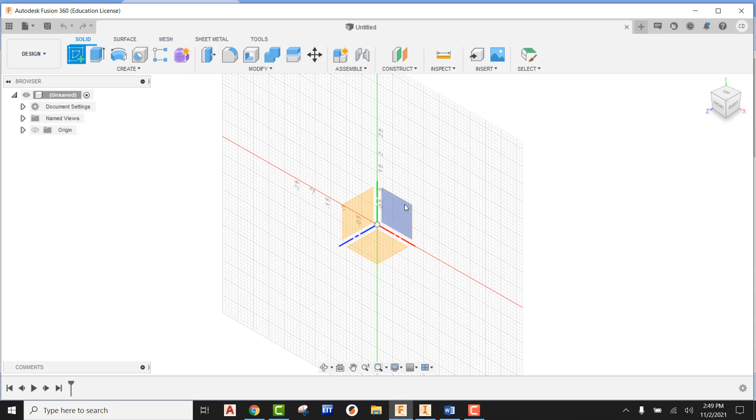So I'm going to be starting these right here on this work plane, and I'm going to be creating my profile that I'm going to use in order to create the candy.

Going up here to create, I'm going to be finding ellipse. I'm going to start my ellipse right here at the origin. I'm going to pull this over to my right and then pull up on it. I don't care about dimensions at this point. That is the shape I'm going to be looking for in order to create the profile.

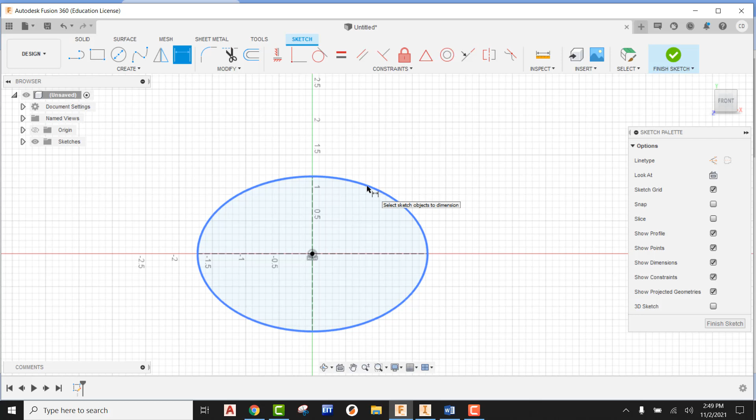Now we can go ahead and begin adding some dimensions to this. Using my dimension feature, I'm going to come here to the top right-hand side of my ellipse. I'm going to pull up on this, and we can see that this is going to be asking us for half of our major axis. We found out in class that half of this dimension would be 0.265.

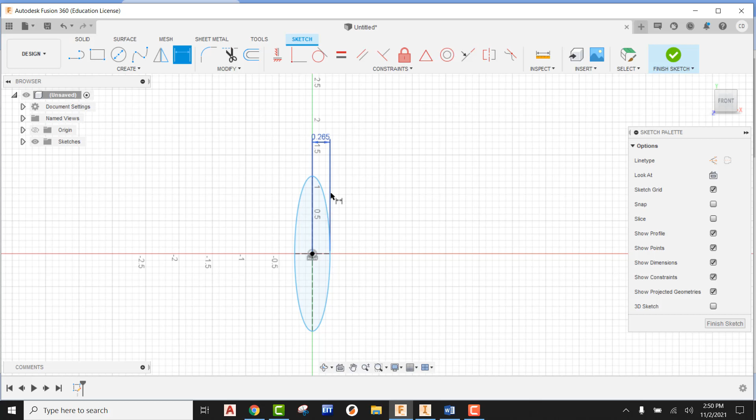Now, if it gets all wonky on us, don't freak out because we still need to add one more dimension. I'm going to be picking the top right-hand corner of that ellipse, pulling this over, and now it's going to be asking for half of our minor axis. We found out in class that was 0.135 using our dial calipers. There we go, we have that ellipse. Our linear dimension this direction is 0.265, and our height is 0.135.

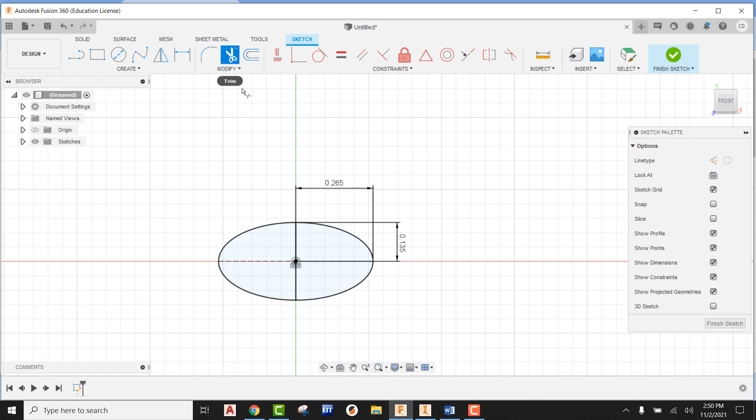Since we're wanting to revolve this, what we first have to do is come up and draw a line at the top of our ellipse, taking it down to the bottom of our ellipse. When we go to revolve, it's going to want half of the profile, so I'm going to use trim. The left-hand side of our profile, I'm going to pick it to remove it, and now that leaves us with half of our ellipse.

I'm going to go ahead and finish the sketch on this, look at this in a home view, and now I'm going to use Revolve. Revolve, if it has just one profile available, is pretty smart. It's going to detect where that closed loop is. We can see it's detected that because it's this dark blue.

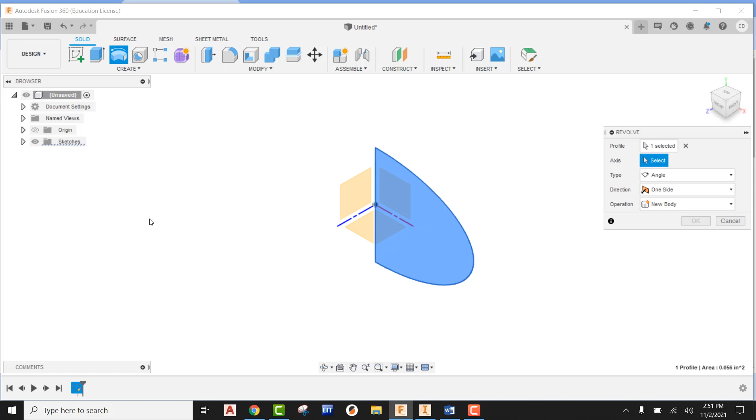Right below that, it's now asking for us to select our axis. Our axis in this case is going to be this vertical line. We send that around the full 360 and we say okay. And there we go, that's the first part of our M&M.

I'm going to go ahead and do a save right now, and I'm going to call this my M&M candy shell. That's going to be my first part. Now, the problem is, if you're looking at this, you're realizing that this is solid. This is not going to be solid, it's actually just going to be the outer shell.

In class we opened up an M&M and used dial calipers to measure the shell thickness. We found that it was 0.02 inches.

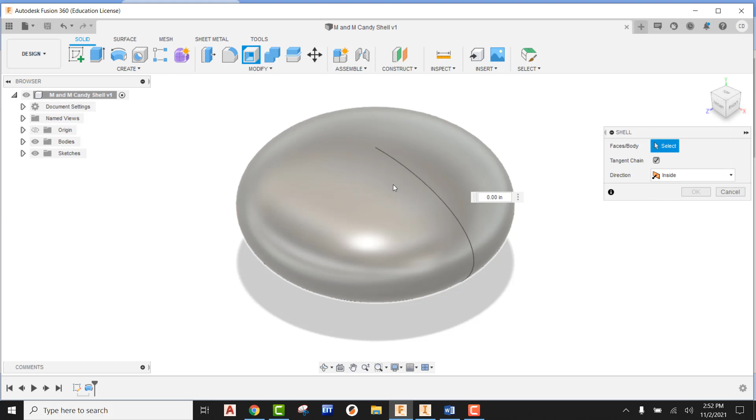So what you're going to have to do is come up here and use Shell. It's going to ask you to select the faces or the body, so we pick it. Now it's asking for the thickness of that wall, so we type in 0.02 and say okay.

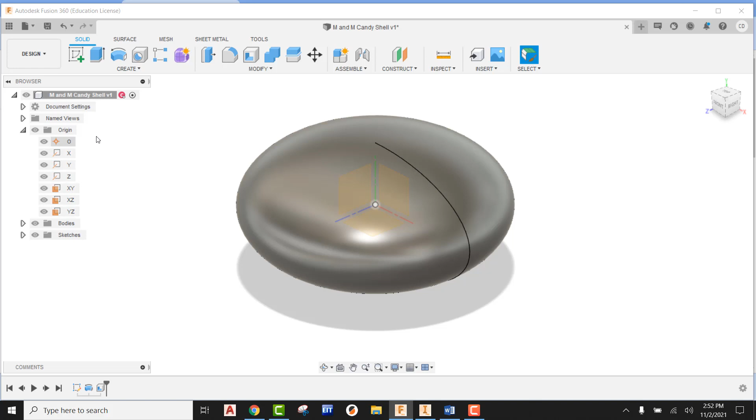It is now shelled out, but the problem is this is completely enclosed, so we can't see if that actually did the job. So I'm going to turn on my origin folder, which will show all three axes, all three planes, and the origin. Up here under Inspect, you can see something called Section Analysis.

If we pick on section analysis, we can go to a plane and pick on it. The good candidates in this case would be this one or this one - this is going to be the long way, so either one will work. I'm going to pick on that.

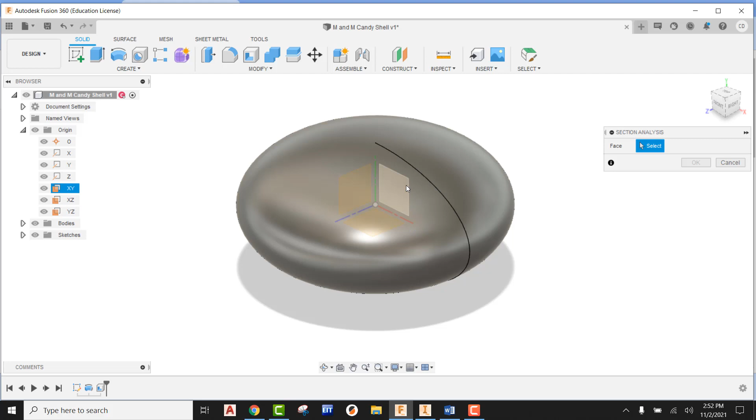Now I can see how it has sliced it down the middle, and I can see the inside of it. We can see that material has been shelled out or scooped out, and now we're left with that wall of our M&M. What's kind of cool is we can grab the arrow and see how this develops over the course of that M&M.

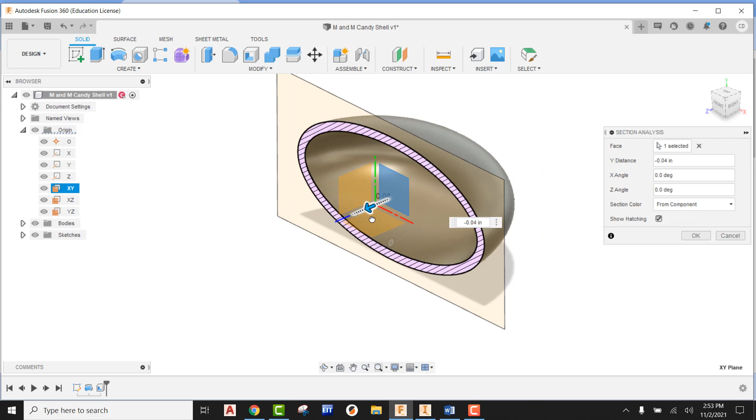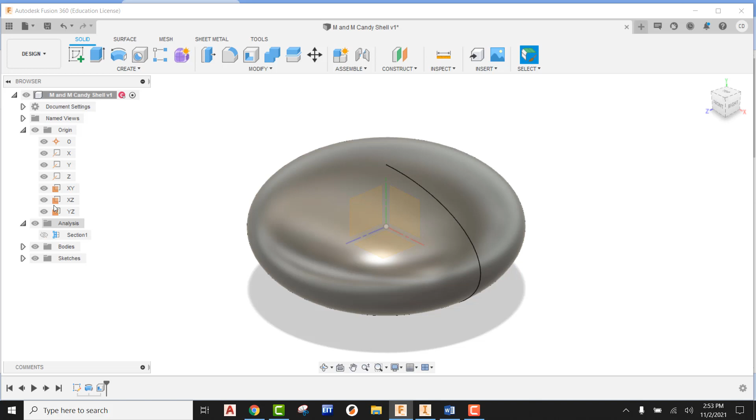I'm going to keep this exactly where it was, which was 0, right on that work plane, and say OK. If you ever want this to go away, come to your analysis and turn the eyeball off next to section - it's no longer going to show it. Also, we can turn off the origin since we no longer need that. Now we can go ahead and do a save.

Right now our M&M candy shell is made of steel. If we want to apply a material to it, we're not going to find candy coating as an option.

What we could also do, if we had the time, is flick and pick the shell off of an M&M and take that over and put it on the scale. That's going to be able to give us a weight.

In order to find out what the density of a material is, we would have to know its mass, in our case weight, and we could divide that by the volume, which we could get from Fusion. The problem is it's really hard to pick off that shell and put it on the scale and actually get a weight. The other thing is my scale in my classroom wouldn't even be able to register that actual weight since there's not enough material.

So what we can do instead is go out and find what the density of the candy coating is. Believe it or not, if we just typed in 'candy coating density,' a company has released what that candy coating shell's density is. If we look, we're going to see ounces per cubic inch - candy coating is 0.59 ounces per cubic inch.

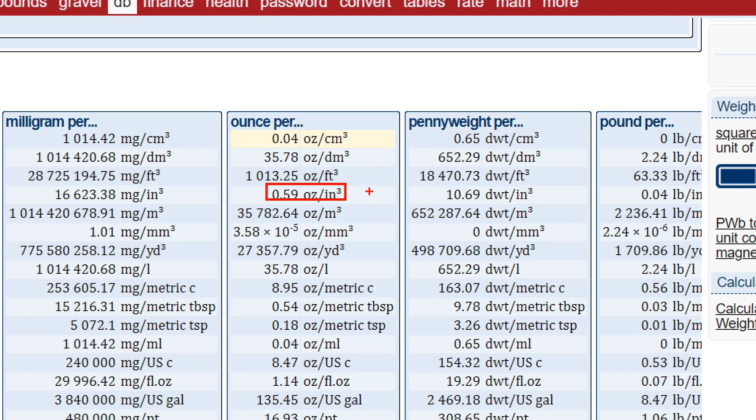Why do we want this particular unit? Well, let's take a look at Fusion. If we jump into Fusion and come up to our candy shell at the top of our browser, right click and say we want to add a physical material, we're going to see all sorts of different materials we can add to this.

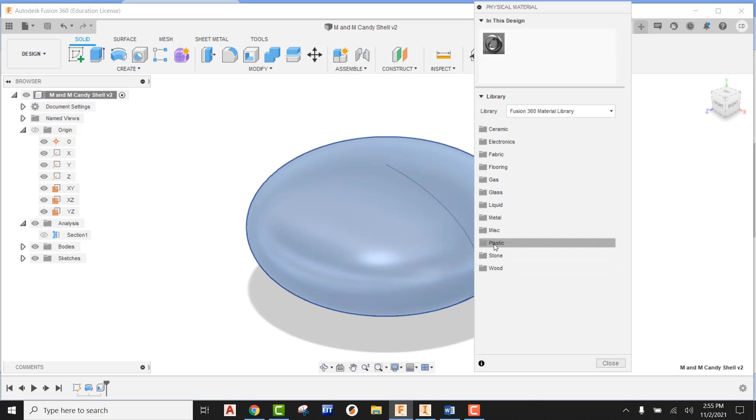In my case, I'm going to go to plastic and drag ABS plastic onto it. We can see it changes, and up here where it says 'in this design,' we can see ABS plastic. If we right click on ABS plastic and say we want to edit it, it shows us that ABS plastic in the material library within Fusion 360 is 0.613 ounces per cubic inch.

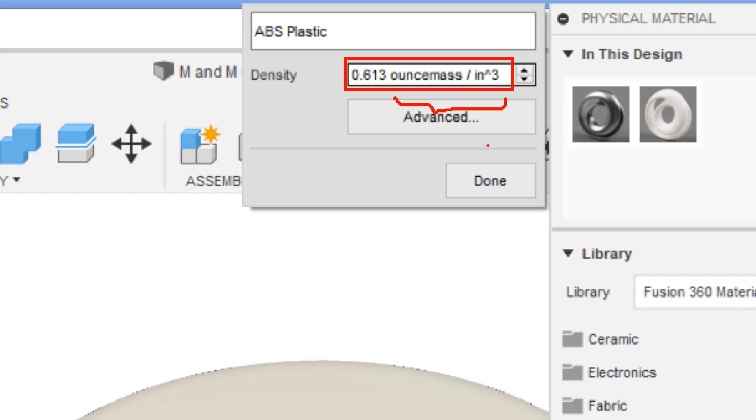That unit should look very familiar - that's what I found online. So now what I'm going to do is just close out of this.

I'm going to come into physical material. If you're just starting this, you need to come down to the plastic folder. We're going to grab ABS plastic and apply it to our part.

We're going to use this as a surrogate. It's not going to be perfect. There's a lot of other properties we'd have to enter, but right now all we really care about is making sure we have the right density so its weight shows up correctly.

So what I'm going to do is come to my ABS plastic after I've applied it, right click on it, and pick edit. Up here at the top, I'm now going to give this a name. In my case, I'm going to say my M&M is going to be red, and I'm also going to say candy coating for my description.

Now my density is coming in. It's asking me, do you want to keep this at 0.613, which would be the one for ABS? I'm going to say no, I want to apply that number I just found online, which was 0.59. So I'm going to change this to 0.59 ounces per cubic inch.

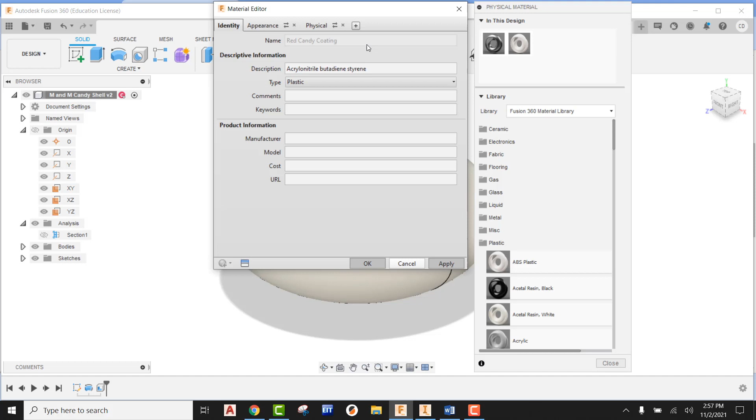I'm not done yet because I want to make it look like the candy shell color. So I'm going to go to Advanced, into the Appearance, come down, pick on the color box, and pick a red color. If this is too bright, you can always darken it up using this slider, but I like how that looks on top. So I'm going to say OK, hit apply, and then cancel out.

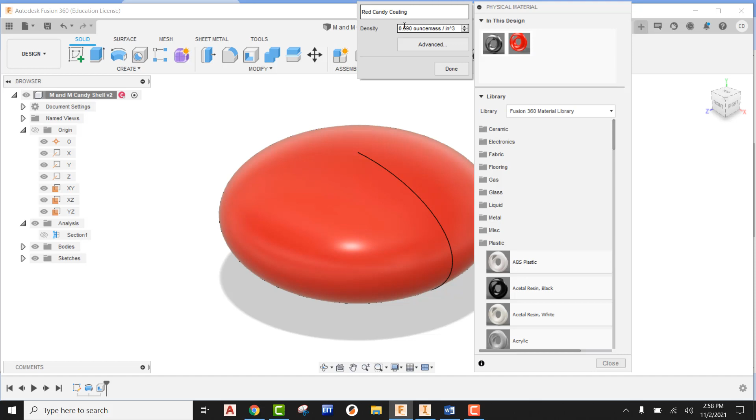Just to make sure we've done this right, I'm going to right click on this again, pick edit. I can see it's red candy coating, it's 0.59, and obviously my color is red. So I'm going to hit done and then close out.

At this point, now we're going to go ahead and do a save. My M&M candy shell is done. So now I'm going to create a new design.

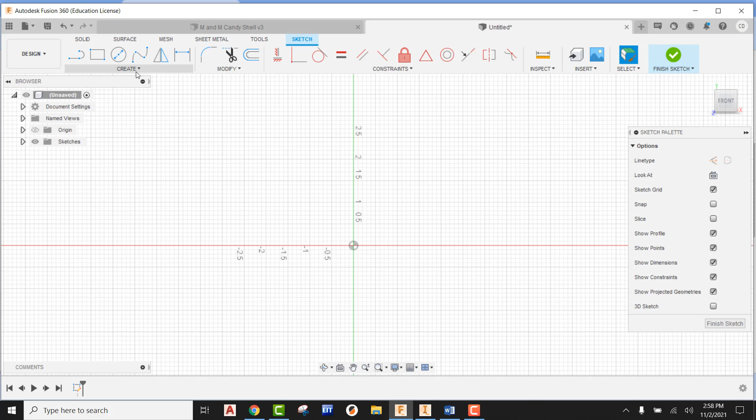I'm going to start it out the same exact way as my last one. We're going to be creating that chocolate center that's in the center of an M&M. So I'm going to create a sketch, go to my same work plane, and go ahead and draw the same ellipse that I did last time.

I'm going to go ahead and create this just like so. I'm going to use my dimension, pull this up. As we said last time, this width was going to be 0.265 — remember, this is my half dimension. I'm now going to apply this dimension for its height, which is 0.135.

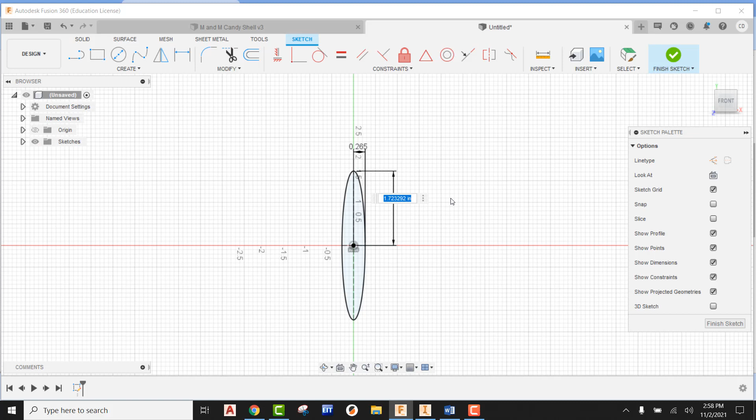Now what I'm going to do when I come in here is I need to create the shell, because right now this profile is going to be the same exact size as our shell. So I'm going to be using offset.

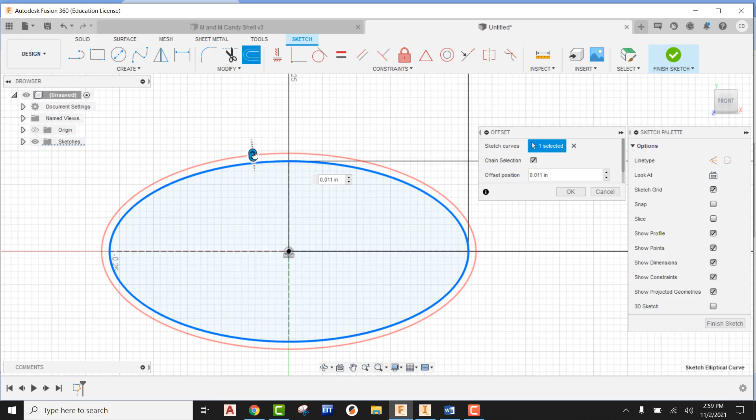I'm going to pick on the ellipse, use the scroll bar, bring it down towards the center, and now it's asking me how far I want to bring that in. So this is just your wall thickness. Since this is indicating negative, I need to put in a negative, and I'm going to type in negative 0.02. And now I'm going to say OK.

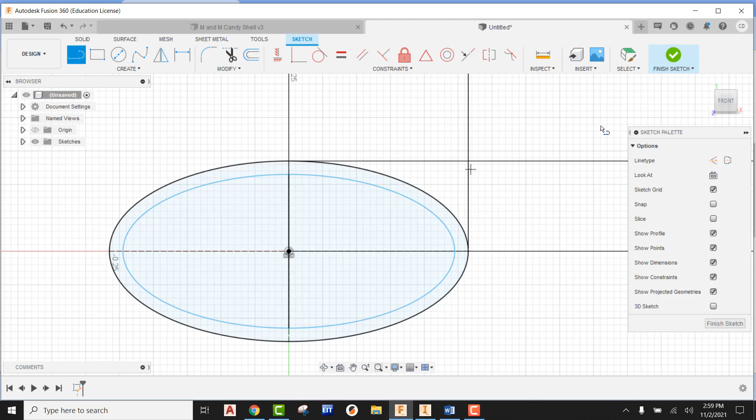So that's the actual thickness of our candy shell. What I'm now going to do is create the profile I'm going to use to create that chocolate center. So I'm going to draw a line starting from the top of this inner ellipse, take it down to the bottom. That's there for me to use. So I'm going to finish up the sketch and look at this in a home view.

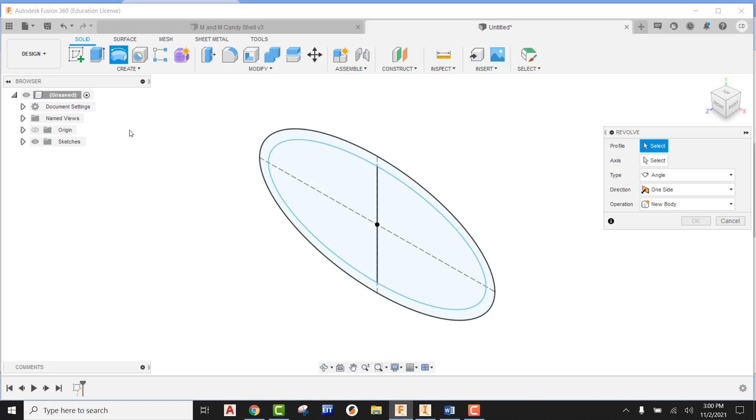Now we can use revolve. Revolve this time is not going to be as smart because there are too many profiles out there. If I were smart, I would have gone out there and trimmed this up and done whatever, but in this case I'm just going to leave this as it is so it shows where that candy shell is. Since it's not smart enough to detect that, we have to come in and pick on the inside of the profile that we want this to revolve.

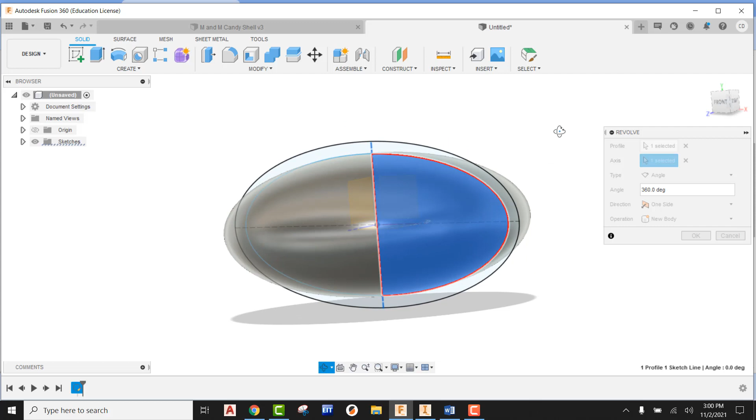Now it's asking us right below, there's a little selection box, we have to pick it. We're going to be picking on that vertical line, and it's going to be sending it around. If I orbit this over, you can see how that chocolate center is right in the middle of where that candy shell would be, and I'm going to say OK. All right, so there is our chocolate center.

At this point in time, I'm going to do a save. I'm going to call this my M&M Candy Chocolate Center, and I'm going to do a save.

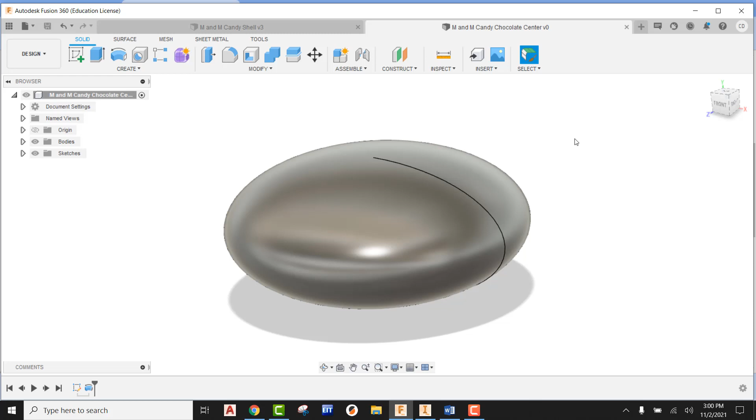So the same issue we ran into last time, right now this is going to be steel, and that's not going to work for us. So just like last time, we're going to go out and find what the density of the milk chocolate is for Mars candy, for M&Ms. We're just going to Google this up, milk chocolate density for Mars, and I can see Mars snack food, this is for M&M's milk chocolate candy. If I come down, I'm going to see that my ounce per cubic inch is going to be 0.51. So we can use that in Fusion.

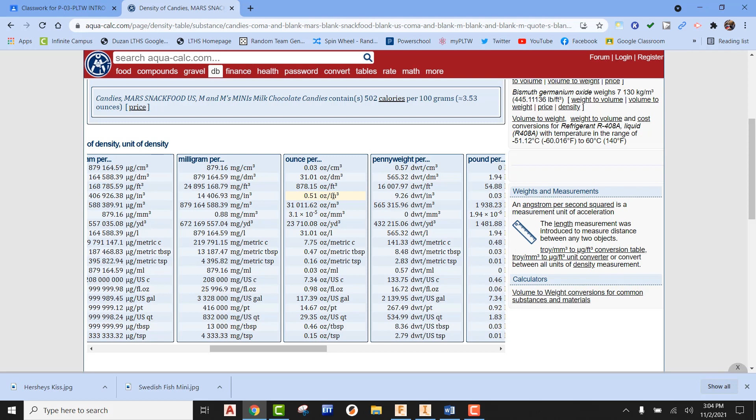So here we go. If we right click up here at M&M Candy Chocolate, what we're going to do now is right click on this and pick on physical material. Once again we're going to be using ABS, and our plastic folder is our surrogate, we're going to apply it to it. Now we're going to come up here to ABS plastic, right click and say edit, and we're just going to call this milk chocolate.

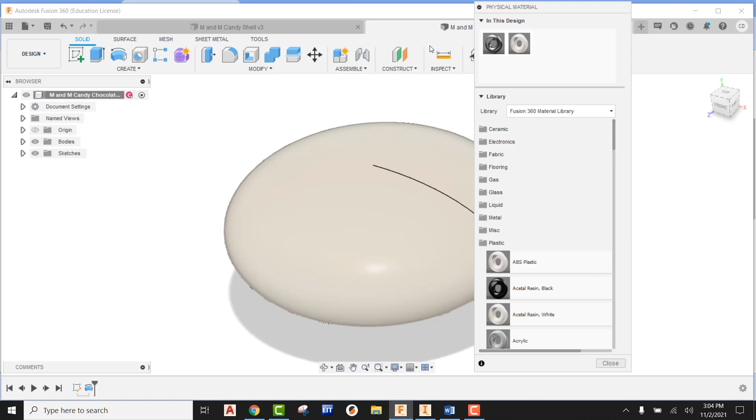Our density is obviously not correct, this should be 0.51. Now we can come in and go to advanced, go to appearance, go to our color. We can select the brown color, darken this up to make it look more like chocolate, say OK, apply it, and cancel out.

Just to make sure that this is right, we're going to right click here and say edit. It's 0.51, it's milk chocolate, it's the color, so we're done. We're done with this, so now we can go ahead and close out and do a save.

The only issue we're going to run into is when we go to create our assembly, there's not going to be a joint origin here. The reason is that even though we've offset the existing ellipse, it's not going to detect that as a point to put a joint origin, so we have to manually put one in.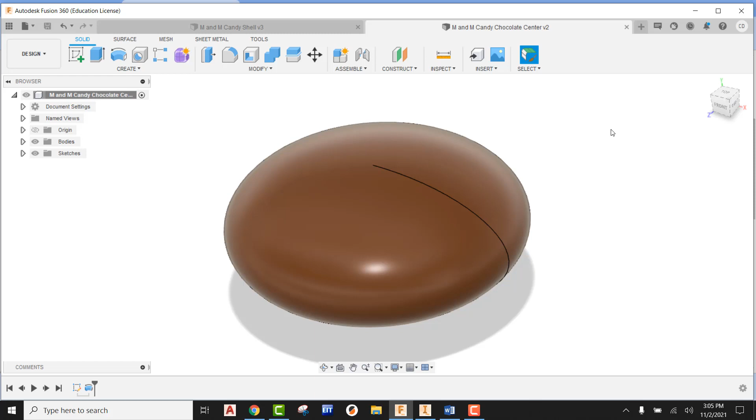In order to do this, we're going to come up here to the origin folder and turn on the eyeball. Now we can see our planes, our axes, and an origin. But since we want to create a joint origin, we're going to come underneath Assemble and pick on Joint Origin. It's now asking us where we want to put our joint origin. We can place that right here at the origin itself and say OK. So now we can go ahead and save that up.

So now we have our chocolate center to use for our M&M. We have the candy shell, we got the chocolate center. Now we're ready for the assembly.

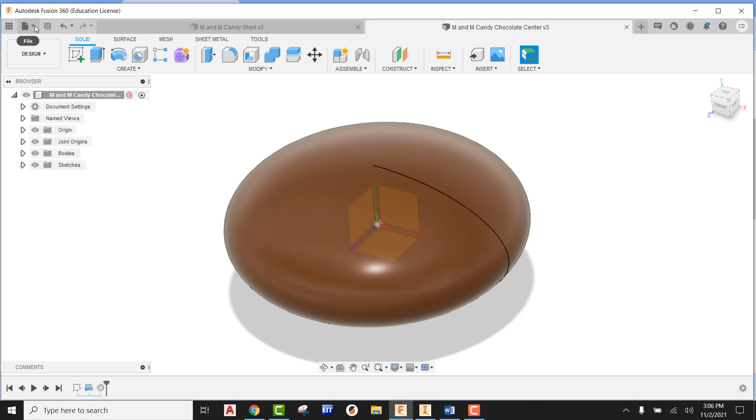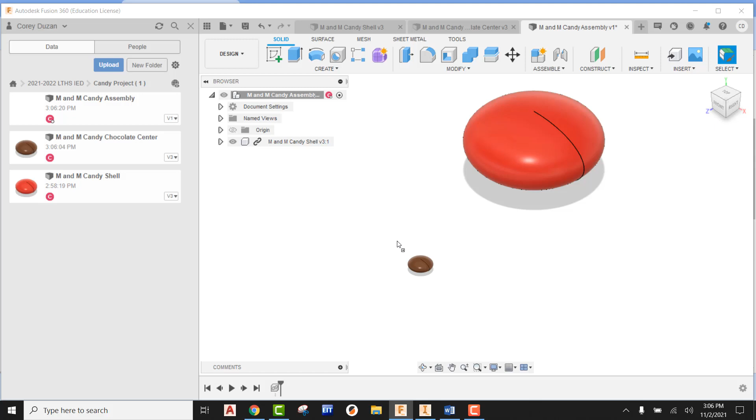I'm going to come up here, start a new design. I'm going to save this as M&M Candy Assembly. Using my data panel, I can go ahead and bring in my shell, drag this off the origin, say OK, and then I'm going to bring in my chocolate center, drag this off the origin and say OK.

The first thing we must do with every assembly is come out here and make sure that one of these parts is going to be grounded. So I'm going to go to my shell, right click on it, and come up here and pick on grounded. So the shell is not able to move, but my chocolate center is.

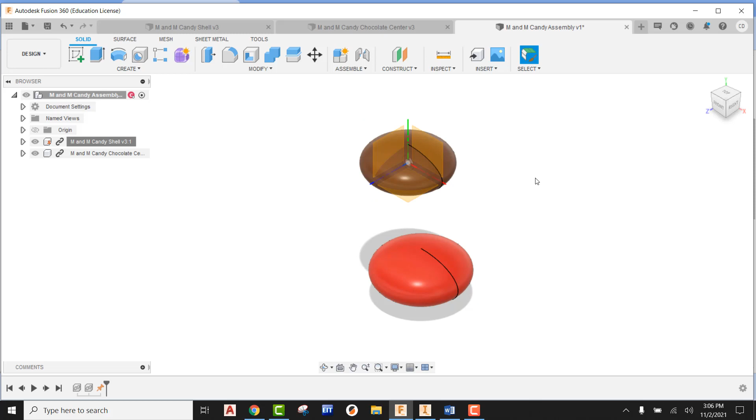All right, so all we have to do now is just assemble this. If we come up here to joint, we can come in here close, we can find that joint origin, we can pick it, and now we can take that over to here, and we can place that right onto our joint origin. For some reason, it's not showing up. Let's try that again.

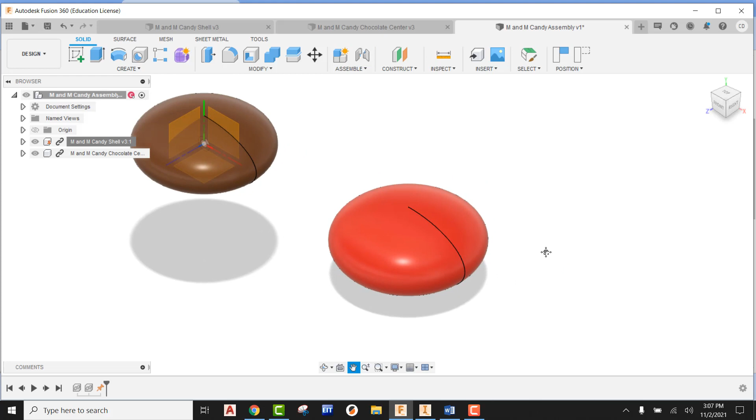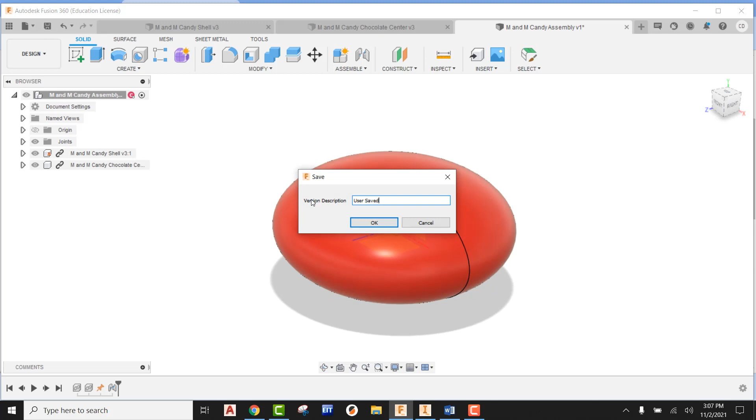There it is, all right so we got that to go in. Now that's totally within the shell itself, okay so we're good to go. We can say OK. Now that that is assembled, we can go ahead and do a save and say OK.

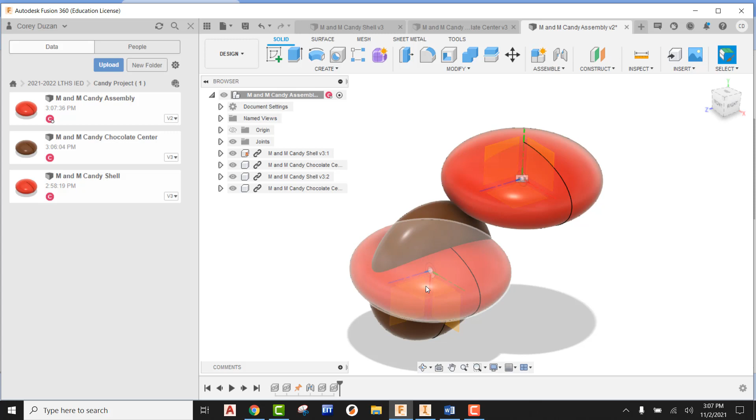Now, what might happen sometimes, depending on the plane that you're drawing it, I'm just going to drag this shell in and leave it right where it's at. I'm going to bring in my chocolate center again. Now what might happen sometimes is that it's going to be flipping in a totally different direction, it might look something like this. You can try joint origin several times and it's just not going to work for you.

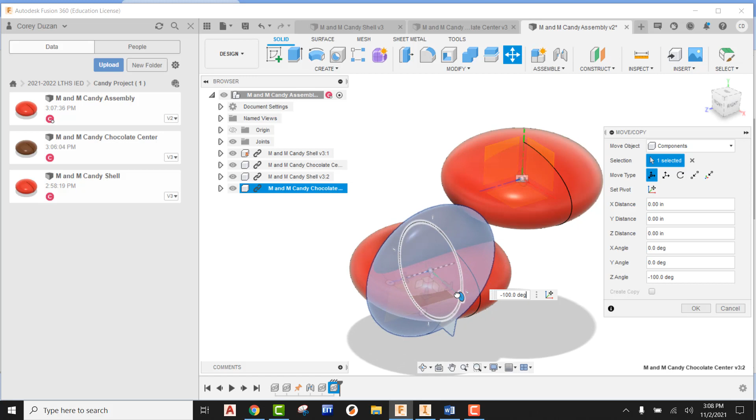So what you can do is this: when you're starting your assembly, go ahead, drag your shell in, leave it right there at the origin and say okay. Now bring your chocolate center in, it's going to show up right there. If it's in a different orientation like it's showing, all you have to do is spin this, get it like 90 degrees or 0 degrees, place it right in the center of it and say okay, then come here to your shell and say you want that to be grounded. That will also do the same exact thing, and then you can save it.

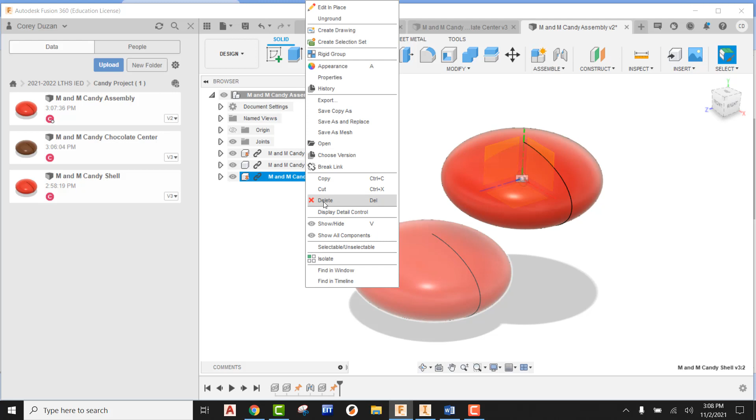But in my case, I don't need that there. I have the one that I need, so I can go ahead and do a save. All right, so my assembly is completely and totally done.

Now what we need to do is create documentation for this. So what we're going to do is switch this from design to drawing, pick on from design. The template that you're going to be needing is our IED title block, our custom title block, and we're going to say OK.

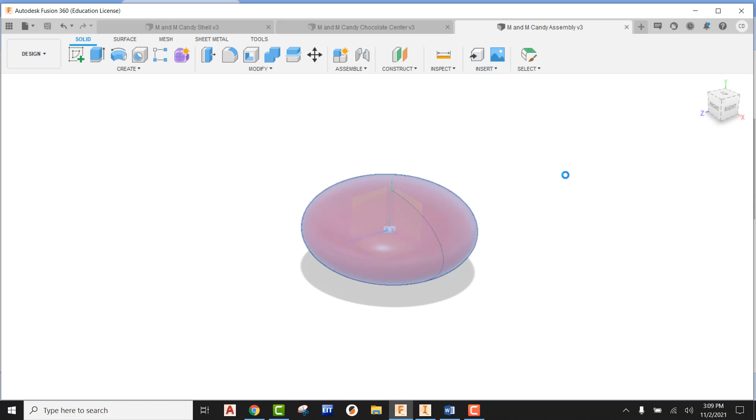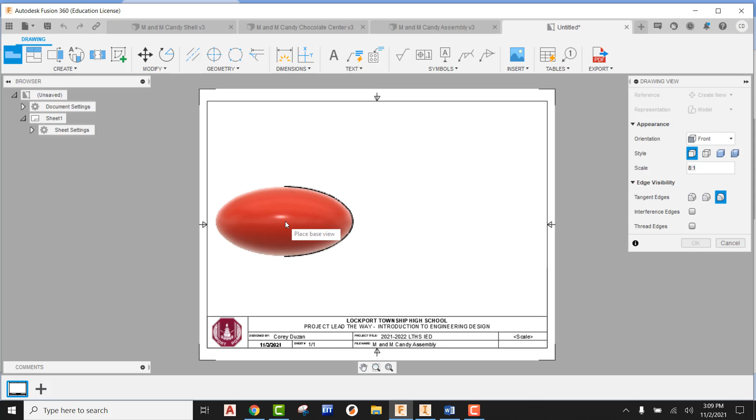So my drawing opens up and I can see my M&M. I want you to make sure the orientation of your M&M looks like mine. If it's coming in looking different, switch it to the orientation where it looks like this. Obviously this is very small, so I'm going to scale this up to 8:1, which is 8 times the size it is in real life. I'm going to place this over towards the center on my left, and I'm going to say OK.

All right, so this isn't really an interesting drawing. We can't really see any of the inner workings of our M&M, so that's a problem. So what we're going to do instead is use something called a section view.

If we come up here, we can find section view. What we have to do first is pick on the parent view, so that would be our front view. Now you're going to see this little arrowhead and the A that's showing up with it. We're going to come here to the top and find our endpoint. I'm not picking on it, I'm simply hovering over it. Now I'm just going to pull up and we can see how it tracks off of that endpoint. That's what we want because we want this line to start out here off of that edge.

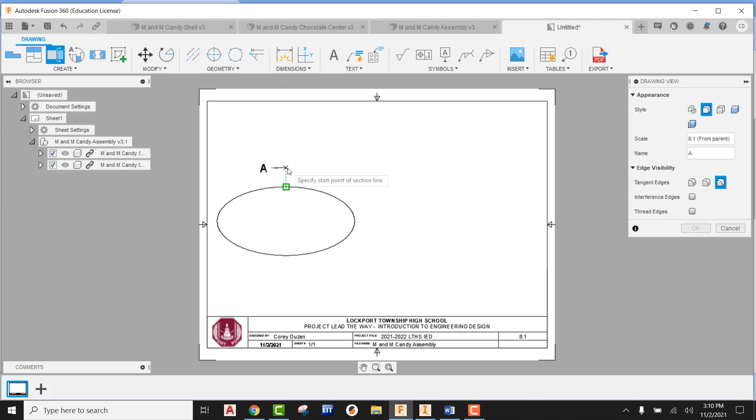So I'm going to pick it to start it, go straight down, keep it vertical, go past the edge out here in space, and pick it to end it. Now I can hit the Enter key, and when I do that, I can see this new view showing up, and it's actually going to be showing the inside of the M&M.

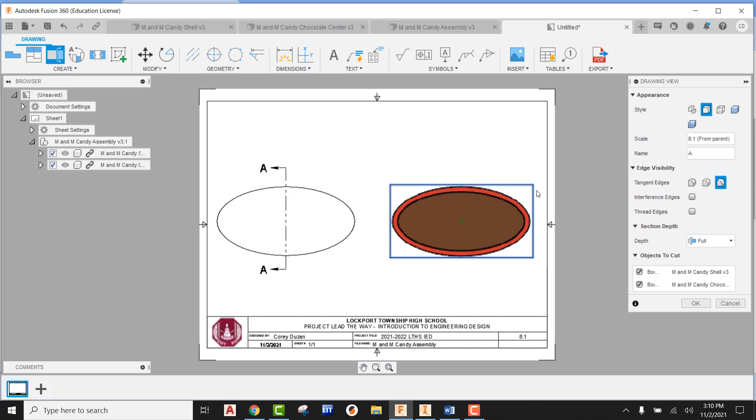So I'm going to place that view, and now come up here and turn this to shaded, and say OK. Now, what's happening here is that it's showing this is made of two different types of material. We can see hatch lines going in this direction for all this material, and then the inside the hatch lines are going in the other direction, showing a different material. But we also have that shaded coming in and working for us as well.

All right, so now what I'm going to do is, well, we need one more view. I'm going to get a pictorial view. So I'm going to come here to the front, pick it, move this up here, pick it to place it, and hit Enter.

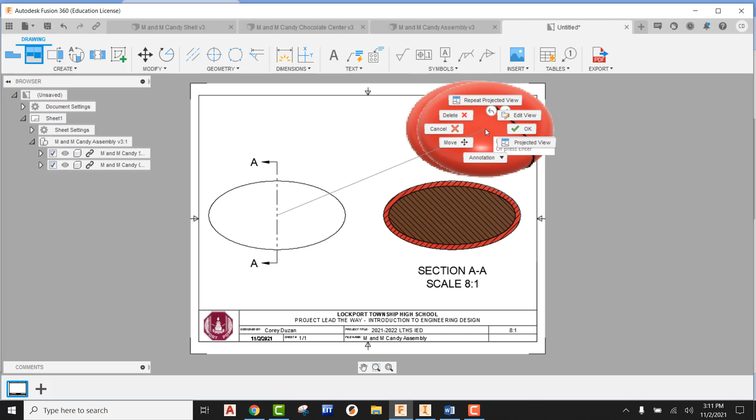Okay, way too big, so let's double click this. I'm going to send this down to half the size it was, bringing it down to 4:1, making sure it's shaded, and close out. Okay, so we have a really good section view, showing how all this looks.

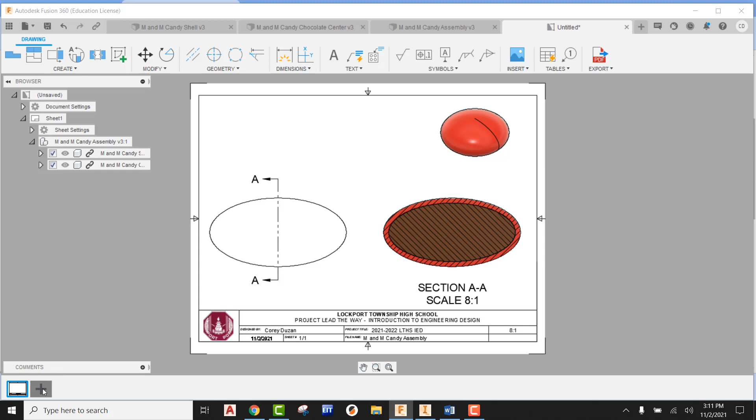Now we need to get dimensions for the rest of our parts. I'm going to add a new sheet, go to base view. We can see my model is in here. I'm going to bring this up a little, maybe like 4:1, drop that in like so, and say OK.

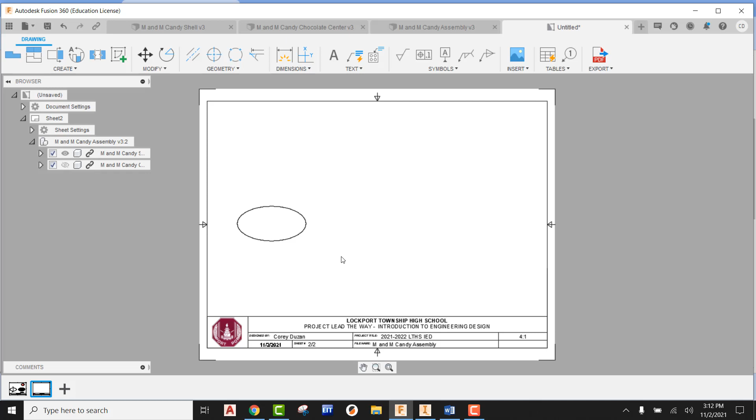The problem is I don't want this to be both parts in one, so I'm going to come to my chocolate center and turn the visibility off on that, which is just going to leave me with my shell. All right, I do want to show this.

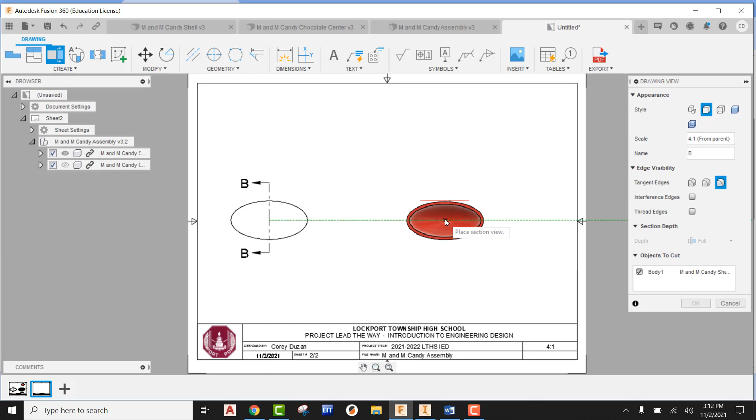I want this to be a section view. I'm going to pick on the view, start here at the endpoint, come up right above it, pick it to start it, and send it down past the actual edge. I can go ahead and hit Enter, go to the right, place that view in, and say OK.

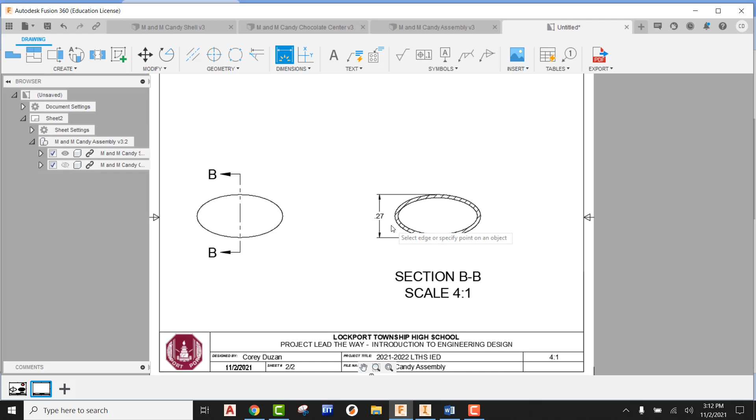So this is the point where we could come out here and start dimensioning this up. Let's see if we can get a center mark, which we can't, but let's just get a dimension from here to here. Okay, we can see what the overall height is, and I'm hoping we can get an actual width as well. Let's see if we can grab it. Looks like we're not going to be able to snag it.

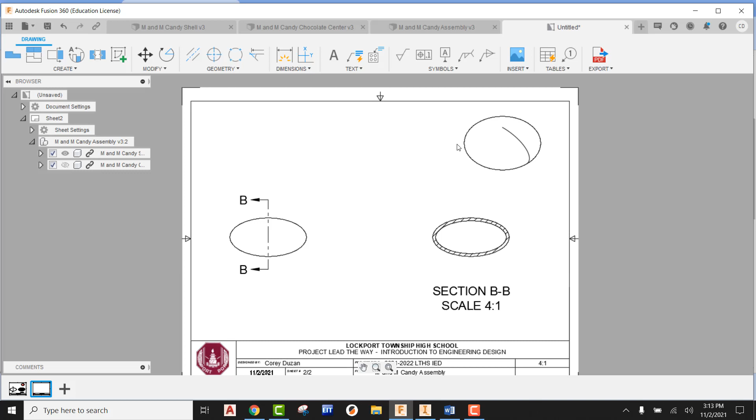So let's just go ahead and place that in as its own separate view, not as an assembly. Now we can go ahead and do a projected view of just that shell by itself, as a shaded view. All right, so that one's done.

Now we can add one more sheet, go to our base view. We'll switch this over to 4:1. Okay, we can place that in, say OK. Now we can come over here and find which one is which. I want that to be my chocolate center, so I'm going to turn off my shell.

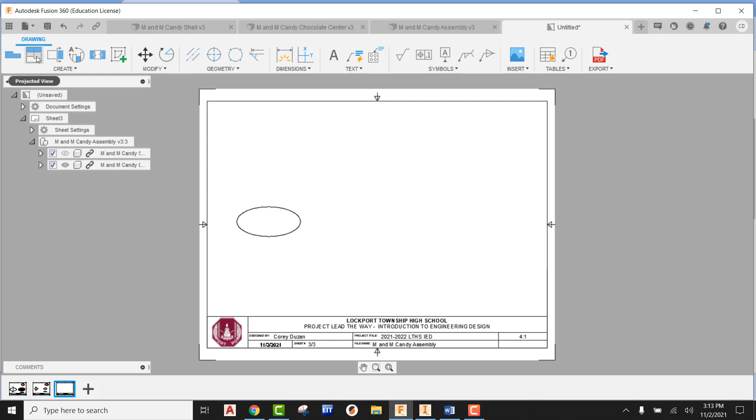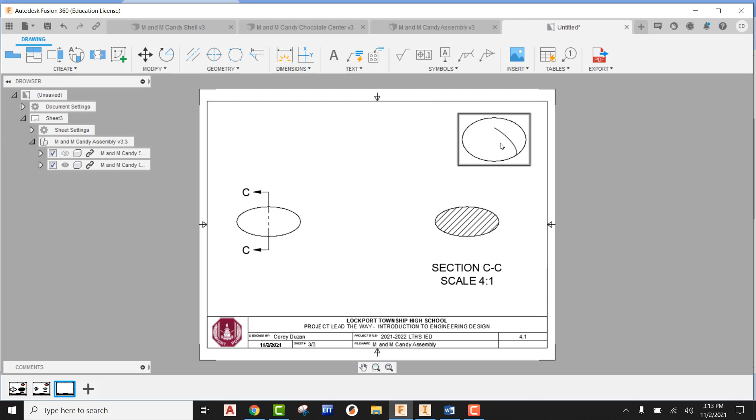Now I can go ahead and once again do a section view, starting here at the top, pull this all the way down through it. I'll hit Enter, pull this over, drop that in, make sure it's okay with that, and now we can go ahead and project a view, showing that at the top as a shaded view individually.

All right, so there you go. That is how we create the M&M for our candy project.

Now that we're at the end, one thing I forgot to mention was, how close were we to the real life thing? So here's what I did: I went over to the digital scale, grabbed 7 M&Ms, put them on the scale, and it told me it was about 0.2 ounces. To calculate this, we take 0.2 and divide it by 7, meaning each M&M should have weighed about 0.028 ounces.

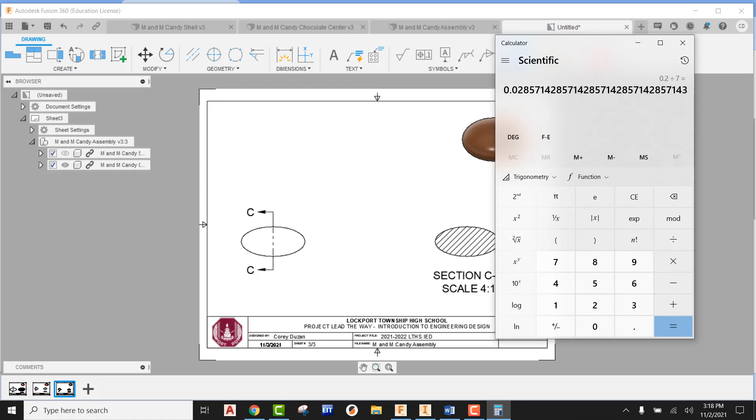So let's see how close we were with Fusion. If we come into our actual assembly, we can come right here to the top, right click on this, and come down to properties. When properties comes up, you can scroll down and find the little arrow next to physical. We can pull this in, and we can see the M&M is telling us it's about 0.021 ounces.

So we're really, really close to the actual value we recorded off the digital scale. We're talking 0.007 ounces difference, which is hardly anything. So we were really close to what it is in real life. That was exciting, we got it really close.

So anyway, that's how you can always check any of your volume, mass, density, area, or center of gravity. That's all built right in to Fusion, so just something to take a look at.